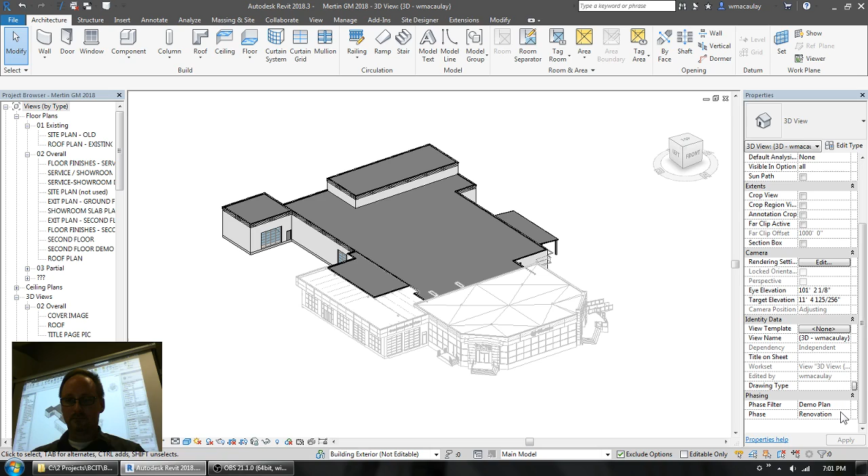So what we have here is a GM dealership that was modeled in Revit, and our consultants weren't using Revit, so quite often your structural engineer won't necessarily be using Revit. Let me get you just a color version of it. Okay, so there you go.

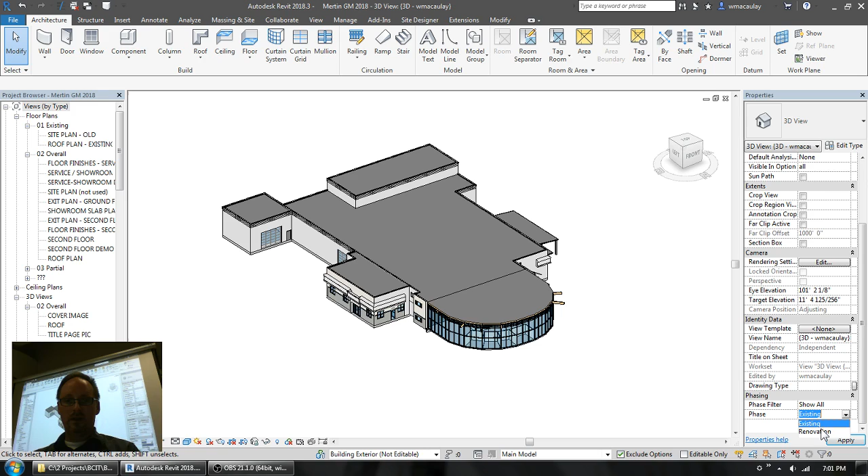Now, this building was kind of what it looked like before. It was just a very round shape at the front. There were some existing glulam beams, so we tore out the old curtain wall, expanded the showroom, and here's the revised version. That's a good example of how phasing was worked, to model an existing building and then add onto it. Here you can see all the existing stuff in the background that's in gray.

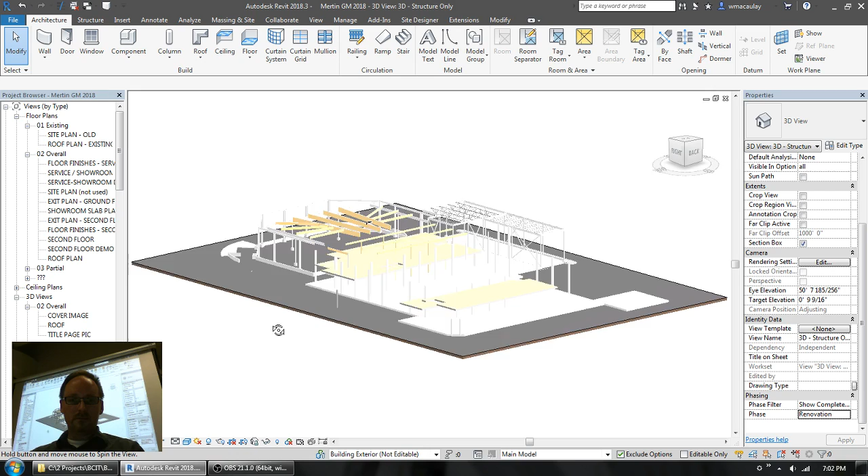Now the structural engineer provided us with their design, and we modeled it in Revit. So we have a mix of the existing wood frame construction, which you can see here, some of these glulam beams, and then the added steel structure around the front of the showroom, and there was a drive-through service that was added as well.

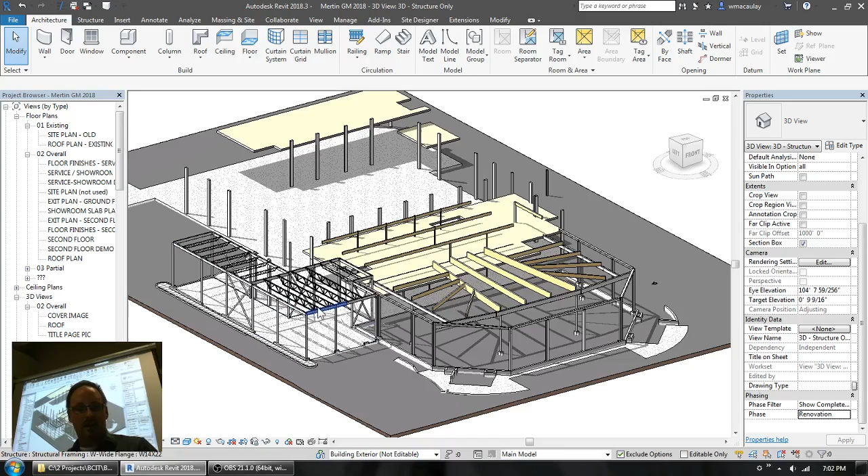So you can see the open web steel joists, steel columns, and curbs that were added. Now, even as the architectural consultant, this was by no means an onerous task for us to do.

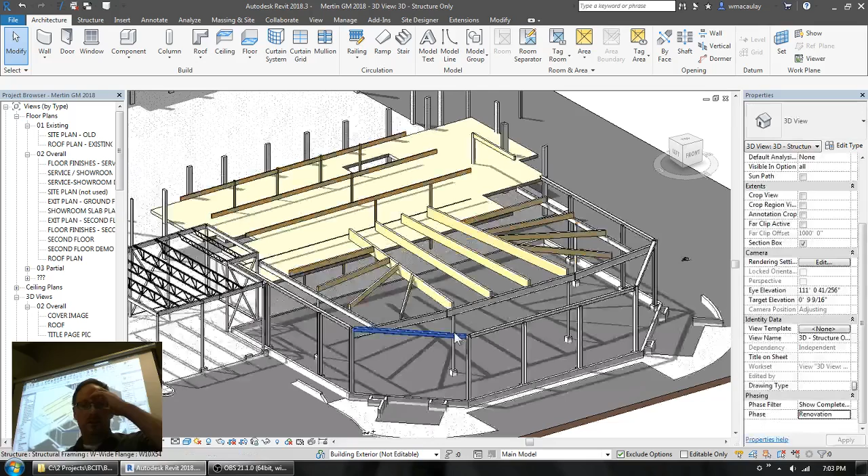As you probably know, the biggest conflicts that happen on site are between your structure and your mechanical systems, and this is no different. So in this project, you can see these big glulam beams here that were being borne on the end of this new W-shaped beam at the front of the showroom.

The problem arose where the mechanical engineer wanted to put a big, huge supply duct in between these two glulam beams and bring it down to the front of the showroom, then bring air supply in a bulkhead around the perimeter. It was quite deep, about 18 inches deep.

Because we had modeled this, we were able to, when looking at the mechanical engineer's drawings, look at a section here. You can see this section never made it onto a sheet—we just used it for exploratory purposes to determine that at the front here we weren't going to have enough room to get the mechanical engineer's duct above our steel beam and under the joists that the structural engineer had specified for this application.

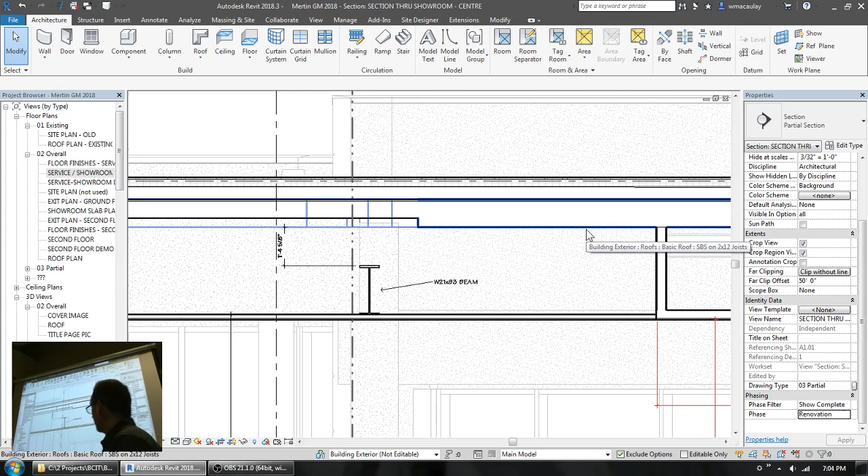So the glulam beams, you don't see them—they're buried behind a gypsum furring wall here that's obscuring the glulam beam sitting behind. So by the time this duct came down, there was no way it was going to clear.

So we had a quick call with the mechanical engineer, and we said, you need to flatten your duct and make it wider so it can fit over top of the beam. There's a good chance it might not have been caught until they were all on site and someone's looking up at the space going, hey, this doesn't work. So we saved ourselves a bunch of hassles by modeling the structure.

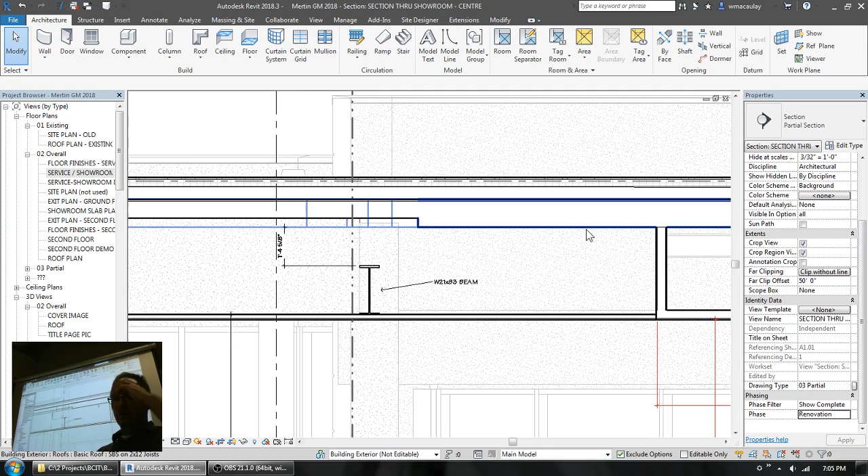Even if your structural engineer isn't providing 3D modeling of the structure, generally speaking, for coordination purposes, it's still a good idea to do so.

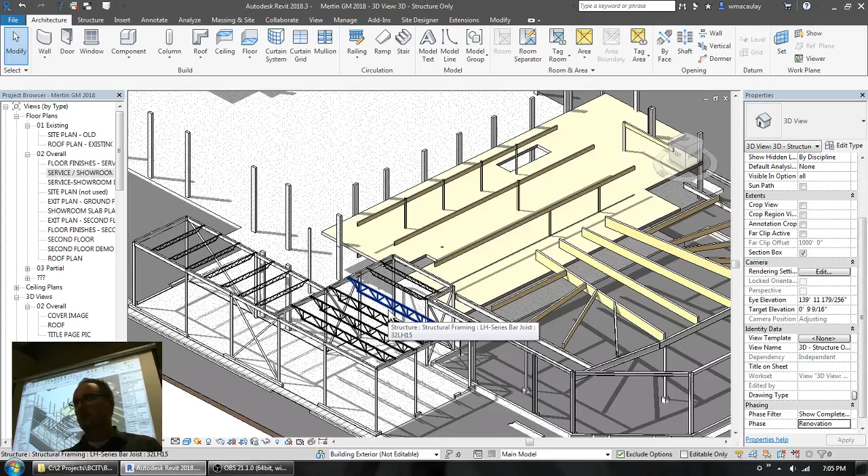Now, we don't model every single joist unless they're exposed, but we do model the major structure. Out here in the drive-through showroom, when you look up at the ceiling you see these joists, and as you can see, there's not very many, so it wasn't a big deal for us to model all this up.

So probably all told, to model this structure, you're not even looking at half a day's work. So definitely a worthwhile endeavor.

So let's look at the different tool sets that are here for the structural engineer. Now, in times past, engineers did model structure—not so much for visualization purposes as we see here, but more for analysis. What I want to show you is what you would often see in those structural engineering programs when they were doing their modeling.

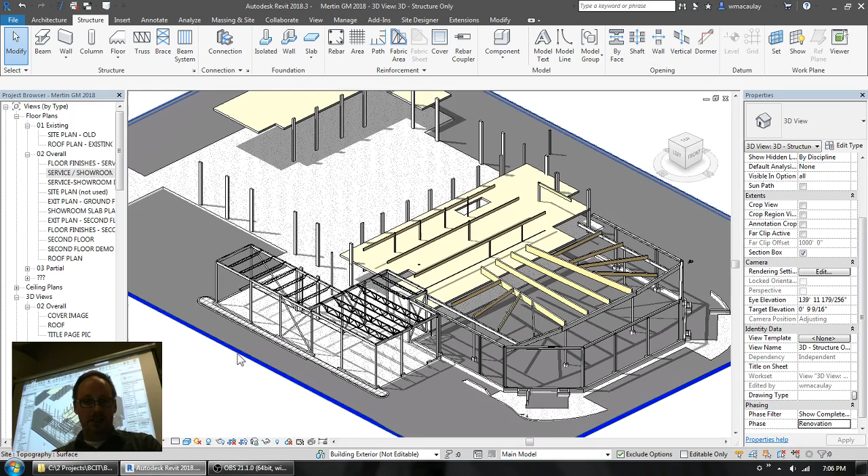I'm going to switch the level of detail here to coarse. Now, actually here, I need to do that with my categories. Just give me a moment here.

Okay, you can see that all of the structural columns and beams are now presenting themselves as a single line. So often when structural engineers are drawing or doing their plans, their plans often won't show the actual physical size of the member. They'll just use a heavy, solid line for that presentation.

During the modeling process, if structural engineers in the past were going to send their model to an analysis program, often those programs didn't model the structure either. This kind of unifies the modeling process for the structural engineering community. Just like you might have used SketchUp and AutoCAD to do 2D and 3D, engineers had AutoCAD for drafting and another program for structural modeling. Now, for them, the structural modeling and the drafting, the construction document process, can be integrated into Revit, just like it was for architects.

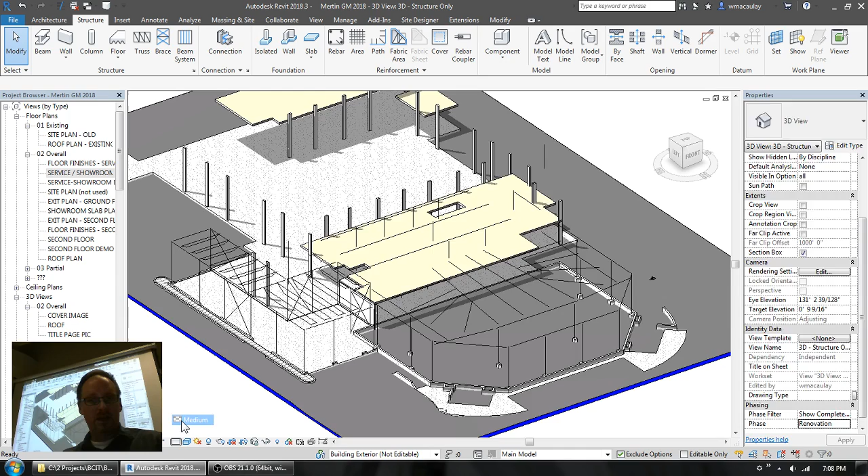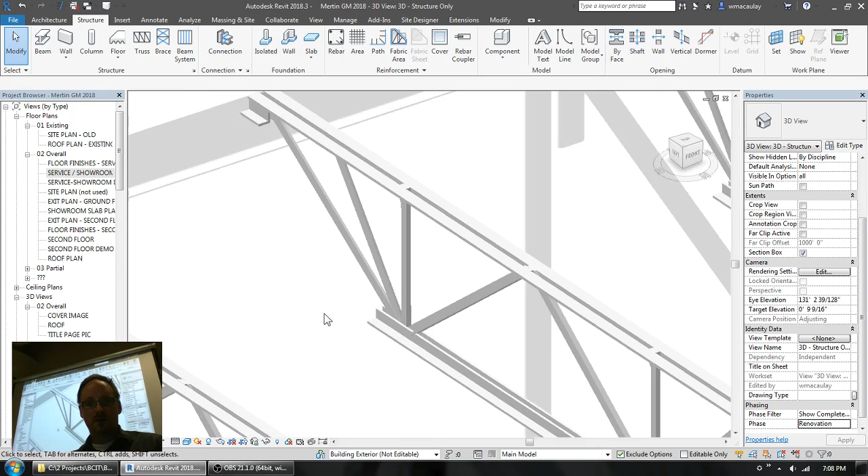Now, if you show structure in a medium or fine level of detail, you actually see the physical size of the members. The difference between medium and fine is only noticeable with certain kinds of structural objects. If you look at these open web steel joists, you'll notice that going from medium to fine actually shows the physical size of the webs. So at medium, you see the physical extent of the members, and at fine, you see them in greater physicality.

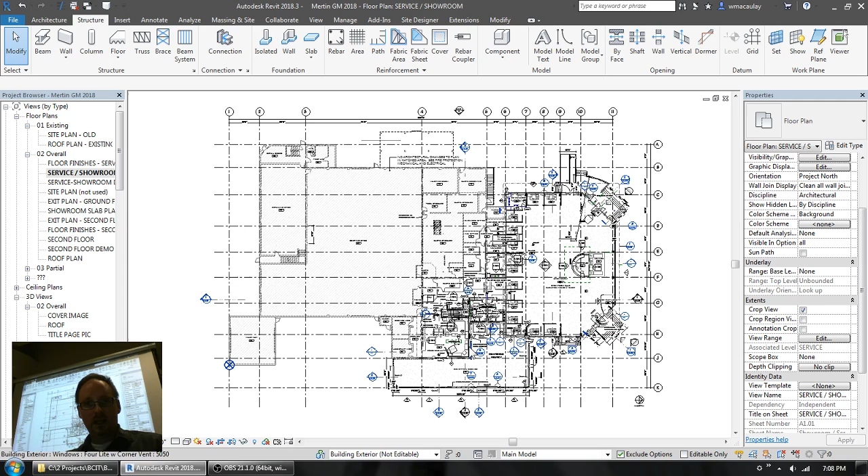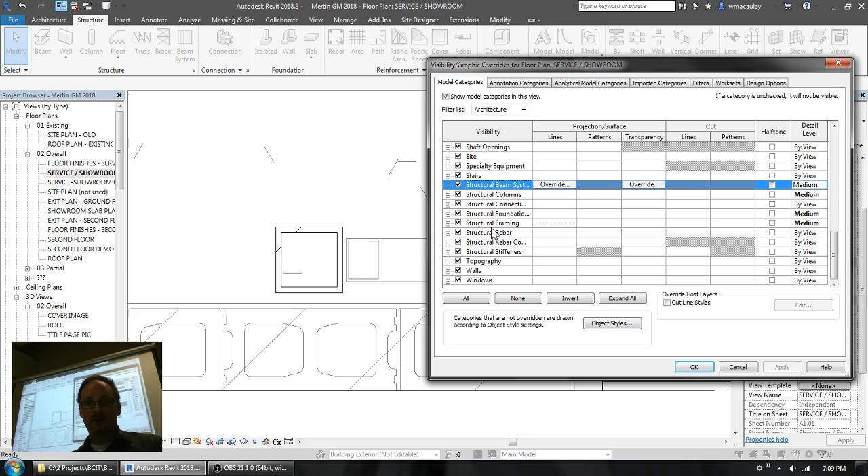There's more to this. In plan, if we look at a W-shaped beam or an HSS tube, let me turn the line weights off here. Now look at this HSS tube. You know that HSS tubes are radiused at the corners. One of the things you can do, which I'll mention as a tip later, is that for your structural categories, like columns and joists, you can force Revit to show them at a medium or fine level of detail.

So even if your overall plan is at a scale that warrants the coarse level of detail, you may still want your structural objects to show with a degree of realism, so you may override them to show as medium, as I've done here. What I want to show you, just like with the joists between medium and fine, is what happens with these columns between medium and fine. So here's the fine level of detail now.

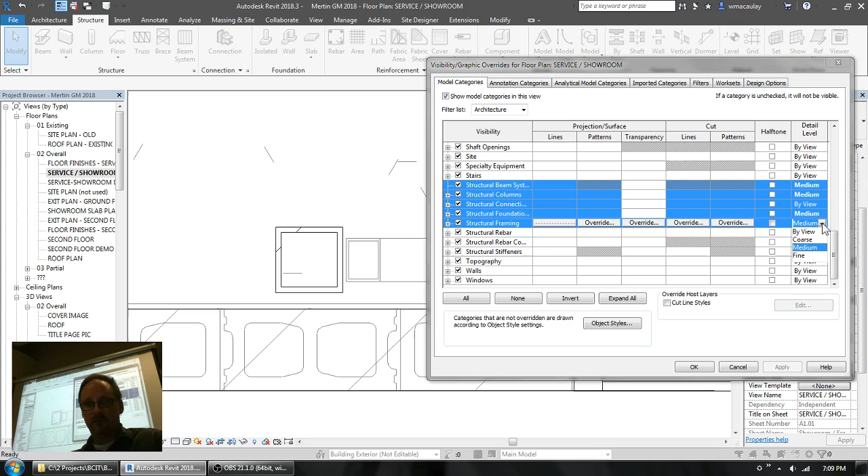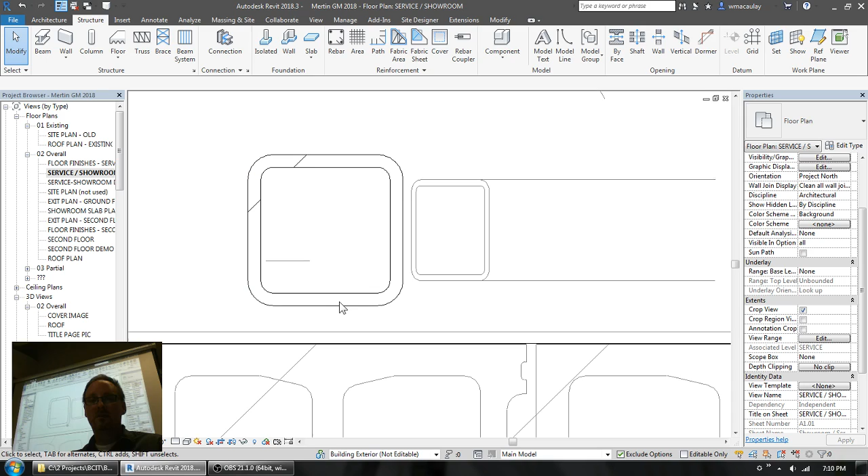So now you're seeing the radii on these HSS tubes. What's going on? What's being modeled here? Well, at the medium and fine level of detail, there are actually two solids inside this column. There's a solid with the radius in it, and another solid that's just mitered to a 90-degree corner. And you're like, really? Why? I don't know exactly. I guess the developers decided that for optimization purposes, showing these actual curves wasn't going to happen until you switch your level of detail to fine.

So just be aware of the differences between coarse, medium, and fine, and how they display on your screen, and that you can, in any given view, override the level of detail for any category. For my structural categories, I'll often switch them to the medium level of detail for my working drawings. And you can see now it's going to switch back to 90-degree corners.

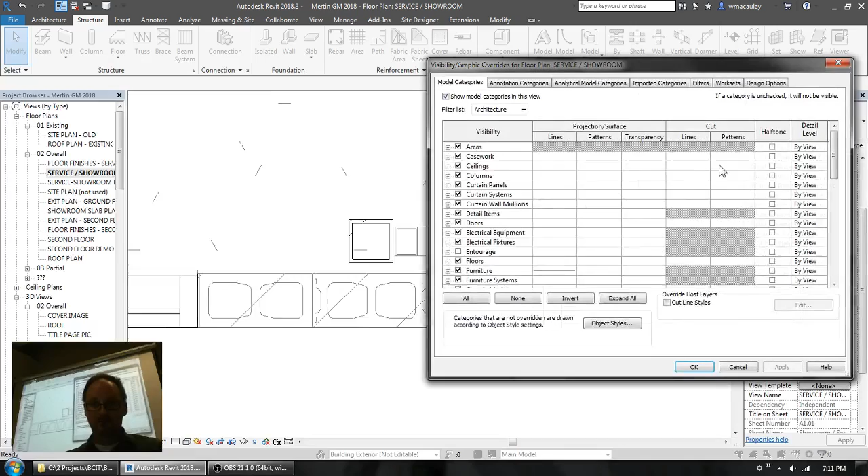At the coarse level of detail, by the way, your columns are no longer being modeled. Revit just shows a 2D line at the extent of the column. So theoretically there's a performance improvement from that, but our computers are so powerful, to me it's like, what's the point? This is a feature that was baked into Revit years ago when we had to model buildings using a Pentium 3. Now that computers have come a long way, I'd say this feature is obsolete. So I will always show my structure at the medium level of detail.

So the structural tools provided are beams, columns, and beam systems, plus your foundation tools. Now I am not going to get into any of the rebar tools, that's beyond the scope of this course. If you're an architect who needs to model the engineer's structure for coordination purposes, rebar is not your gig. Just stick to showing the columns and beams. So that's what we're going to focus on tonight. Now there's a certain strategy or order of operations to creating structure.

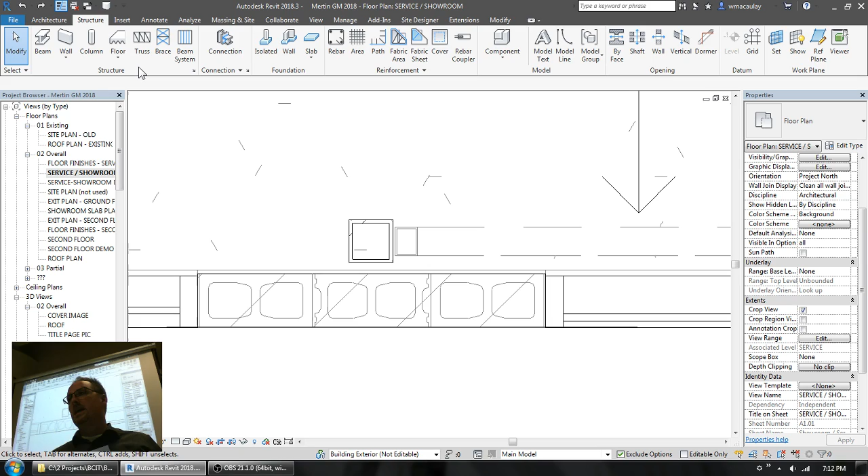If you look under the structural tool set, we talk about creating columns first. So you put your columns in, and then beams, and then beam systems. I'll show you why in a few moments, but that order is analogous to how we do our buildings in Revit. We start with the walls first, right? We draw the walls for our plans, and then we add floors and roofs.

At the bottom of page 1, we've talked a little bit about the difference between structural and architectural drawings. Structural drawings show the structure supporting the floor that you're looking at, and architectural drawings will show the structure above or within the room that you are standing upon.

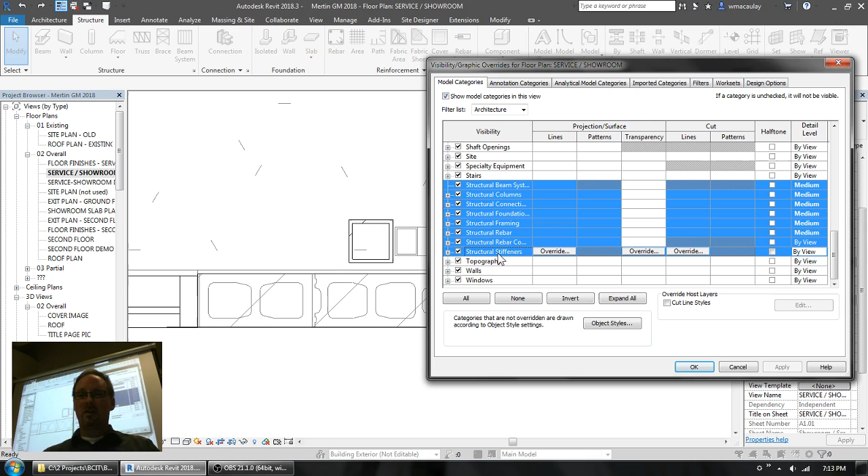We talked about the simple heavy line, and we'll often override the level of detail in a view. So you go into your visibility dialog box, just like I was showing you, and go down to the structural categories, pick the first structural category, shift-click the last structural category, so that you can override all of these categories at once, so that you don't have that super simplified presentation of structural objects in your views.

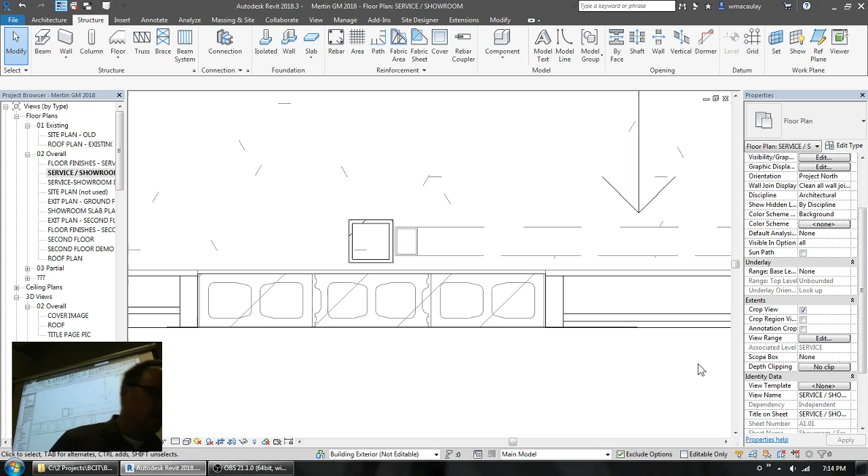Point number 3 at the bottom of the page, we talked about how structural columns, when you draw them, will tend to draw downwards, and architects will draw the columns upwards. So when you start using the structural column tool, the very first thing you need to do is switch from depth to height when you're putting in that column, so it goes upwards in your plan instead of downwards.

Another aspect with modeling structure is how multi-story structure will be drawn. If you have a residential tower of multiple stories, many of you I'm sure have worked on such projects, what happens is you'll have a column of a certain size at a lower story, and as you get up to the higher stories, that column gets smaller and smaller, or thinner, or changes shape as you go from one story to the next.

Now, if a column is of a certain size for 10 stories, model it as one column that's 10 stories tall. It's easier for you if you have to move that column around in your parkade to get the parking layout to work. Move it around, and then that column for the next 10 stories up is going to be in a different place in your plan, and you won't have to truck through all the plans and relocate that column.

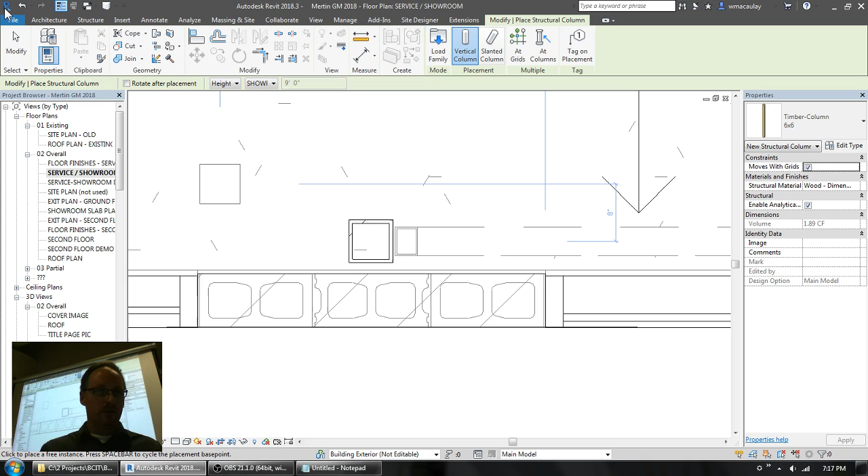All right, so let's move over to the next page here. Now I am going to start a blank architectural project, and I recommend that you folks do the same. So I'm going to start a new project here.

Now what I would recommend that we all do is create a set of grids in each direction. So just draw 3 or 4 grids in each direction so we can talk about how the structural column tool works in conjunction with your grids.

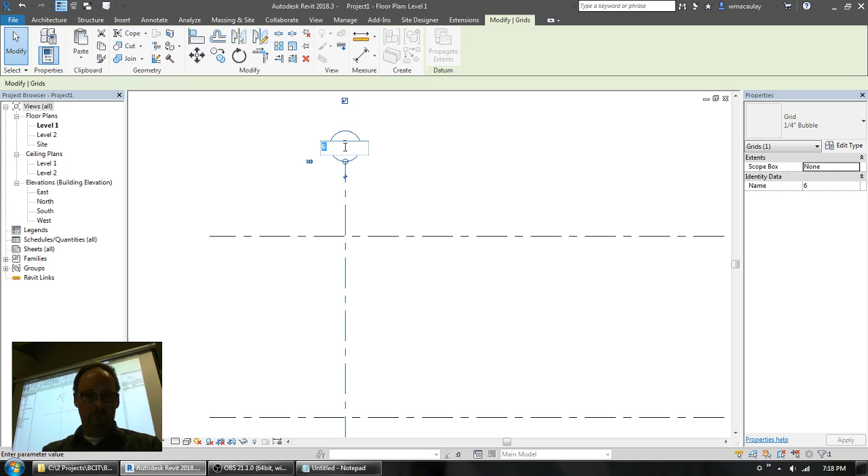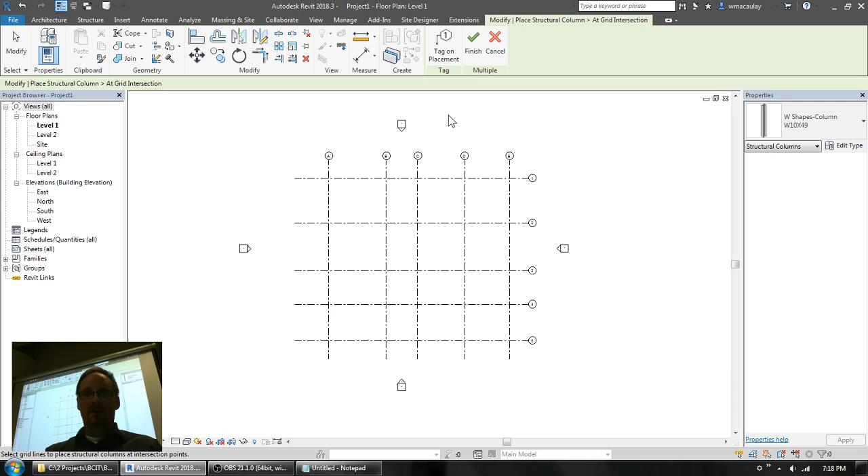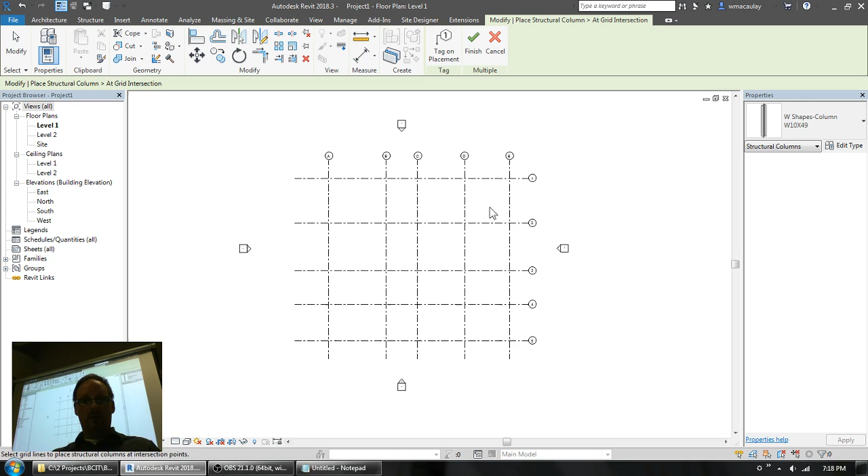Structural columns are often put at grid lines and at grid line intersections. So when we are using the structural column tool, there is an At Grids option. If you click on the At Grids option, you can see the Revit interface changes a bit, and it's giving us this situation. If you look on the status bar, it says select grid lines to place structural columns at intersection points. So if I just select a couple of grids, have a look.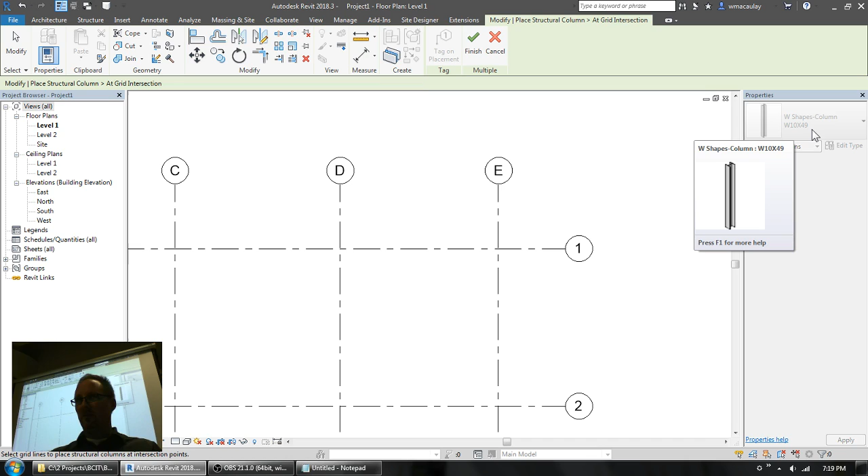First of all, before you even get started here, you have to choose the column type that you want used at all these grid line intersections. So if this W10 by 49 isn't the right size, you want to preload that column before you get started. So no big deal there.

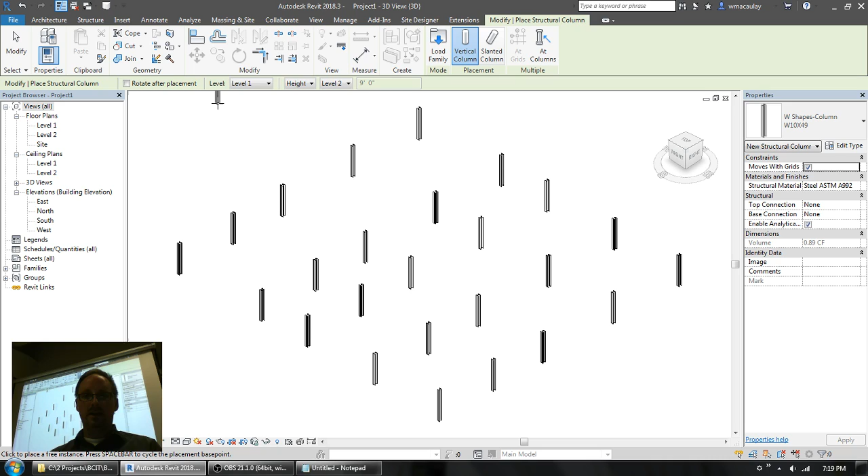So if you crossing select all of the columns, you can see now that if you hit finish, you get columns at all of those intersections. So when you look in 3D, there's your column layout, placed at all of the grid intersections.

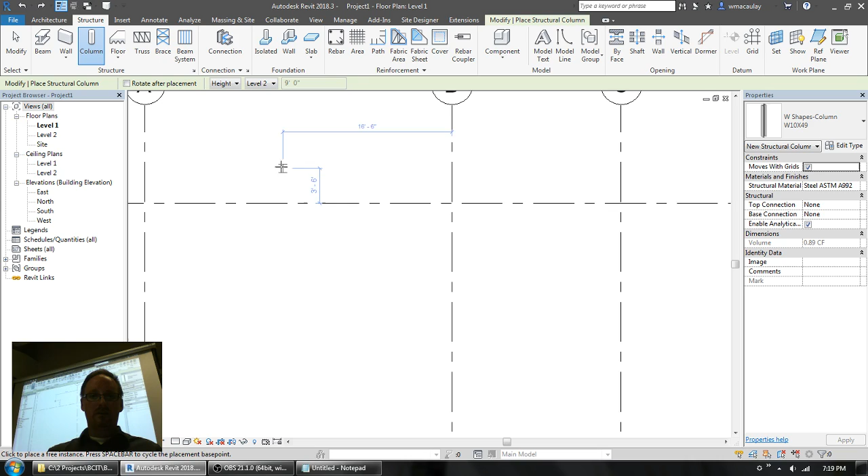Now I'm just going to undo that step and talk about some other aspects of the column placement. If you're using the structural column tool, you don't have to place it at a grid, you can place it anywhere. When you hit the space bar, it rotates at 90 degrees. If you put it on a grid, it rotates at 90 degrees. But if you place it at a grid line intersection, it rotates it through 45 degrees.

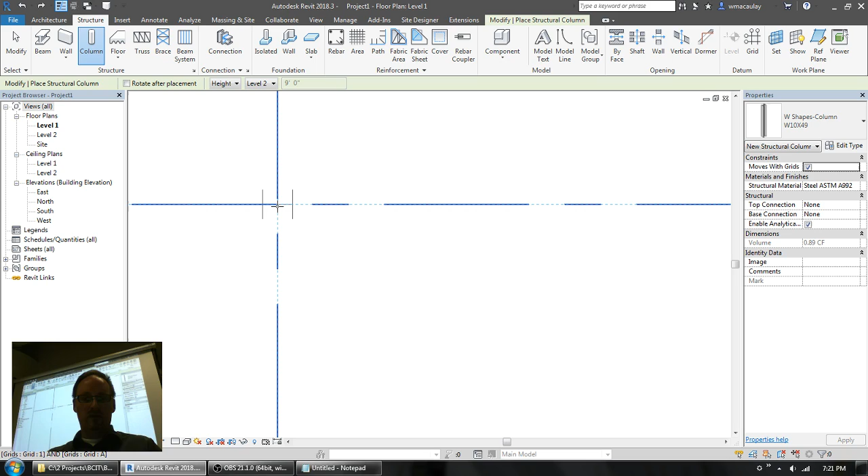Why is this? Well, it's quite common in steel construction for 45-degree angle grids to be put in place, to prevent or resist lateral loads and to deal with diagonal bracing in a floor diaphragm. That's done in steel construction, and of course steel construction is probably more common in the States than it is here. So that bit of functionality where you hit the space bar and it rotates the column through 45-degree angles, that's where that feature comes from. Just hit the space bar when you're at a grid line intersection and it rotates the column around.

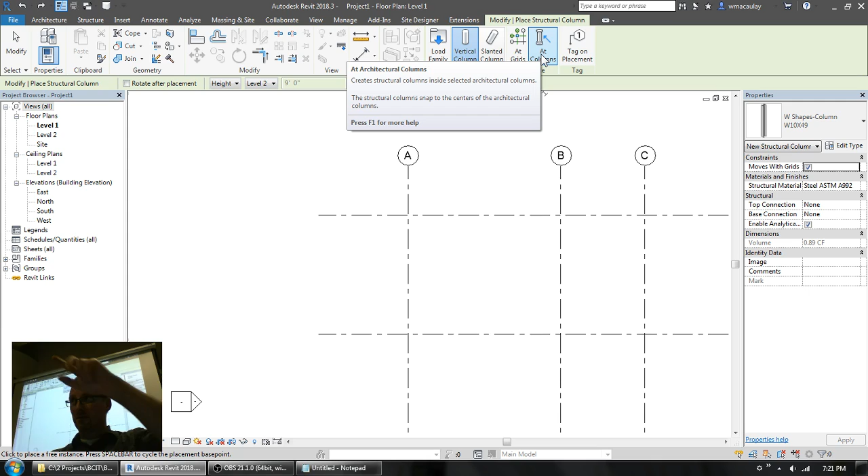Now you'll also notice on the Place Column tab that you could place a structural column at a pre-existing architectural column location. So if you have some architectural columns already in the view, you can hit the At Columns button and it'll place structural columns at locations where architectural columns can be found.

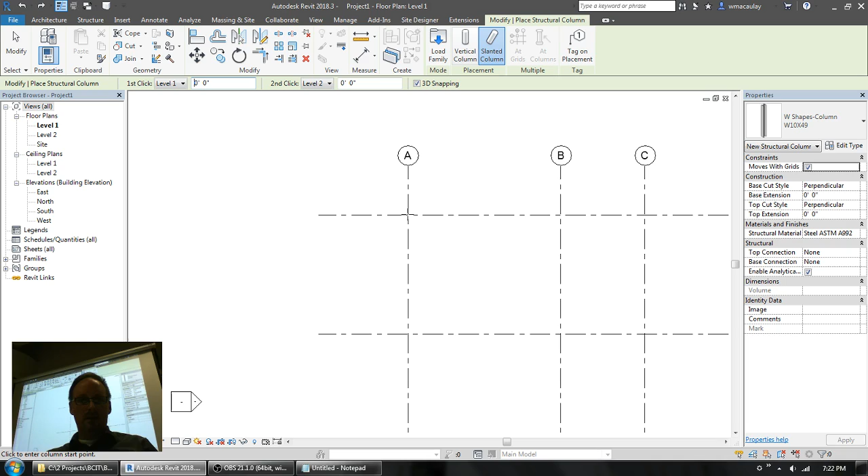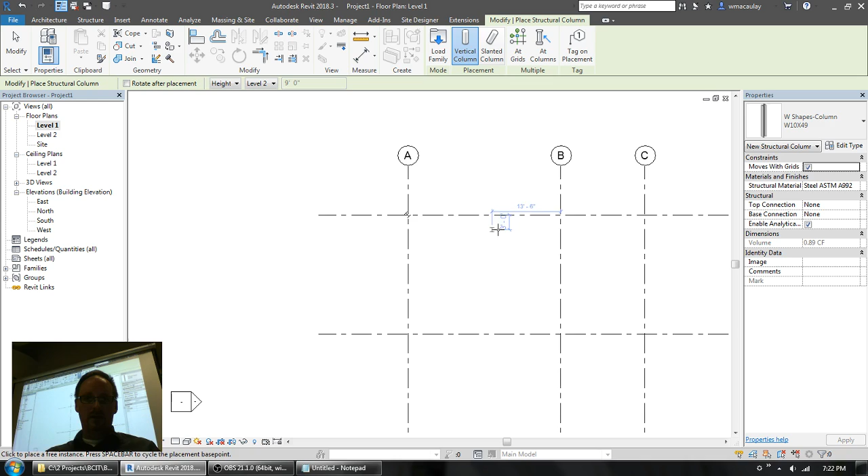So I'm just going to place this in here now. And if I go back and look at it in 3D, there's my column. Now just to give us some context here, I'll go back to my level 1 plan and put in some columns here, vertical ones, just in these other locations, so you can see what I started with. So there's the 3 vertical columns and the 1 sloped column.

You mean like trim it at the top so it's cut off? No, if we want it to be 3 degrees or 90 degrees. Oh, okay. So the question is, how can you place a column at a specific angle?

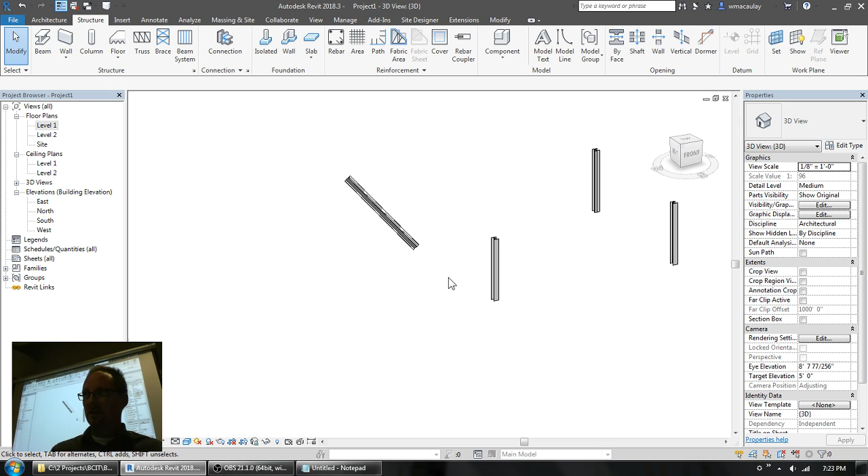That's a good question. So what I'm going to do is, this column here that I'm placing, I want to put a column on here at this grid intersection at a 45-degree angle and leaning out at a 10-degree angle. So how would I do that?

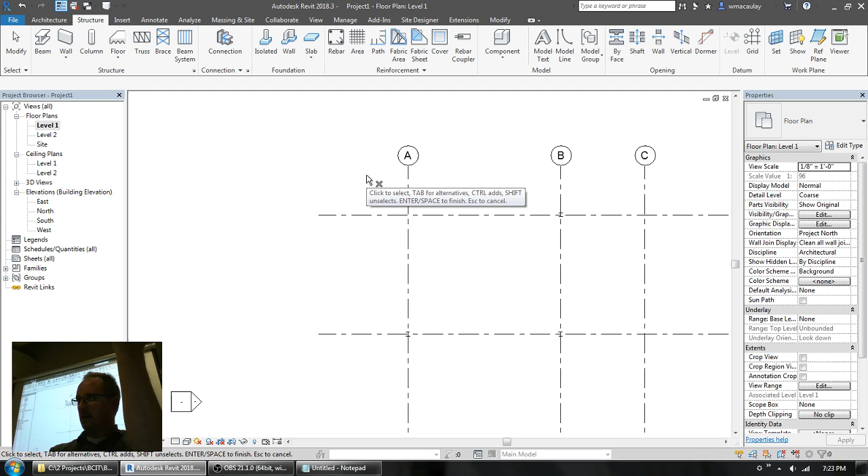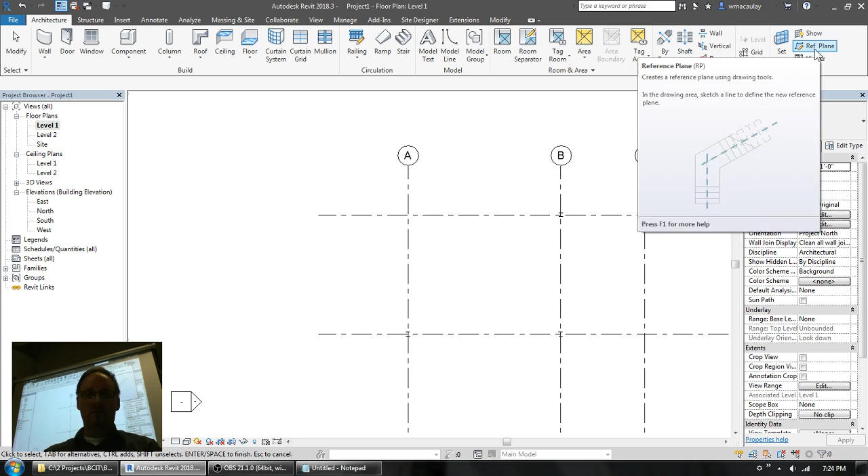Number one is we would put in a reference plane. Reference planes are really handy when you want to put geometry at a certain location, especially if you need to draw it on an angle. So I'm going to draw a reference plane here from this grid line intersection, going out at a 45-degree angle. I'm looking for 135 - there it is. So I've got this reference plane sitting here. Now what I'm going to do is name that reference plane. After you put in a reference plane, you can name it, and you'll see why we do this in a moment.

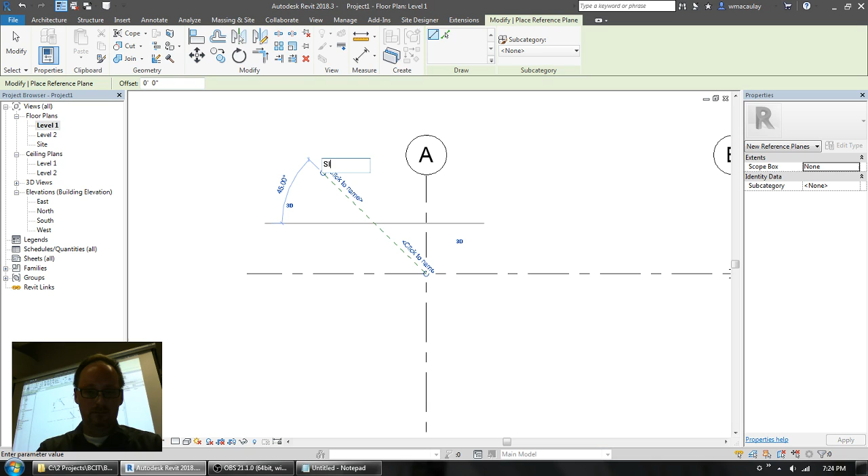So I've called this reference plane sloped column. Now what I need to do is create a section or elevation that's looking perpendicularly at this reference plane, so I can draw that slanted column on it.

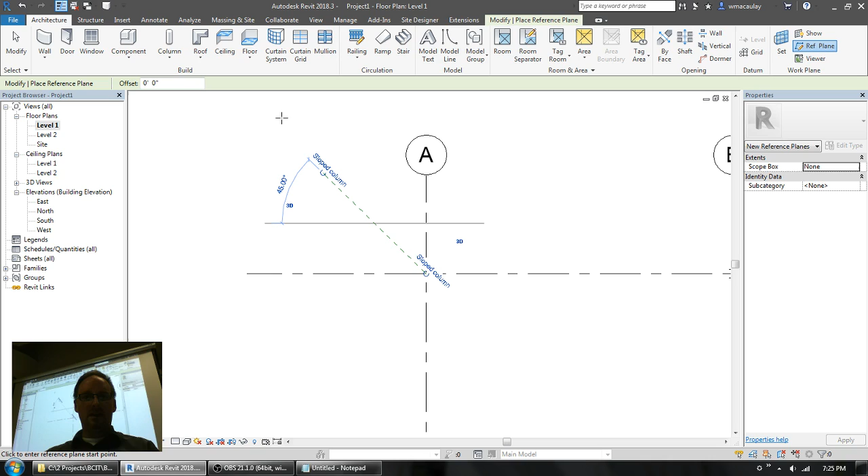There's a couple of ways to do this. On the View tab, you can draw a section, and when you draw a section parallel to a reference plane, it will snap to it. Revit pays attention to the location of those reference planes. That's one way. You could also draw an elevation, but no, that's not going to work here. We're going to use the framing elevation instead.

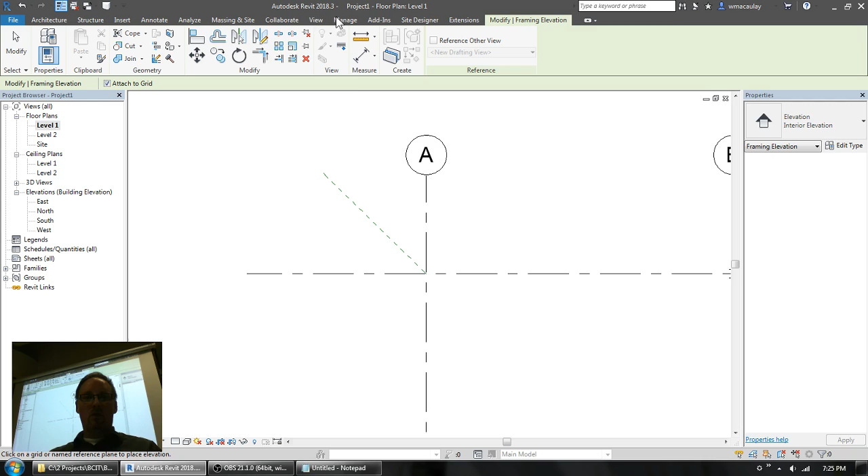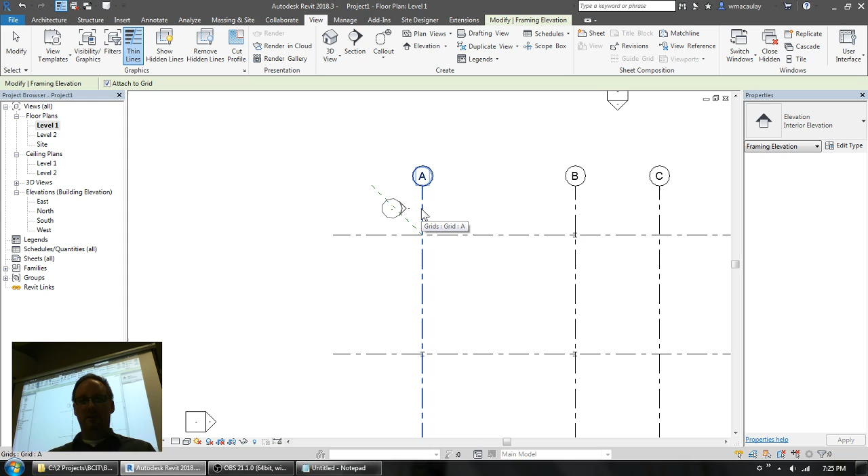View, elevation, framing elevation. Now look at this. When you use the elevation tool on the View tab, there's a drop-down menu. I'm sure you've used the standard elevation tool frequently, but we're going to look at the framing elevation tool. When you use it, it will automatically snap to and pay attention to grid lines and reference planes. So now we can create an elevation that is looking perpendicularly at that reference plane. So there it is.

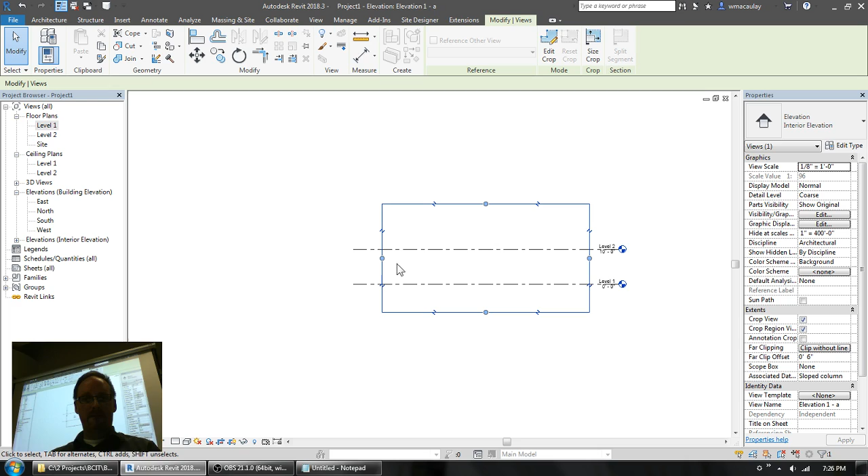So now the next step is to open this elevation view, just by double clicking on the pointer. And there's my elevation. Now, how do I know where I'm starting from?

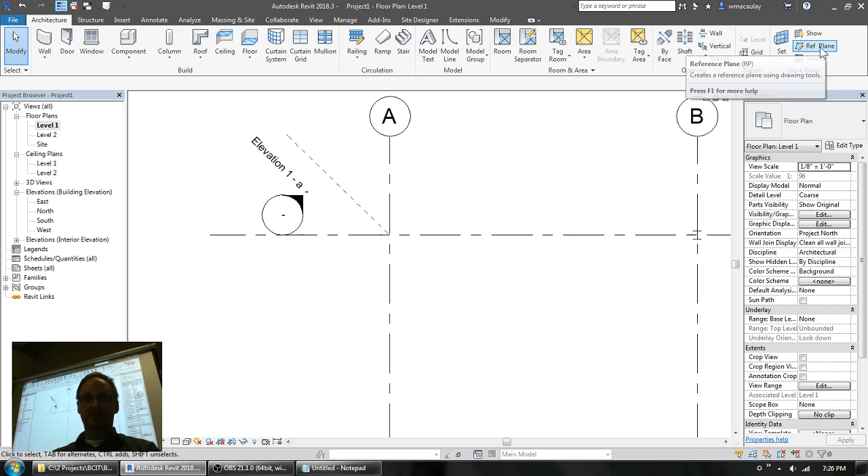I've got my two levels here, but I can't see where I'm starting from, so I need another reference plane to show that. On the Architecture tab, I'll grab the reference plane tool again, and I'm going to draw another reference plane perpendicular to the first one. I need to do this so that in that elevation, which is looking perpendicularly at the placement plane for our column, we can see where the starting point is with that other reference plane.

I don't need to name this next one. It's just going to be there as a reference when I look in plan, or when I look in my framing elevation. So I will return now to the framing elevation. So there is the starting point for my column.

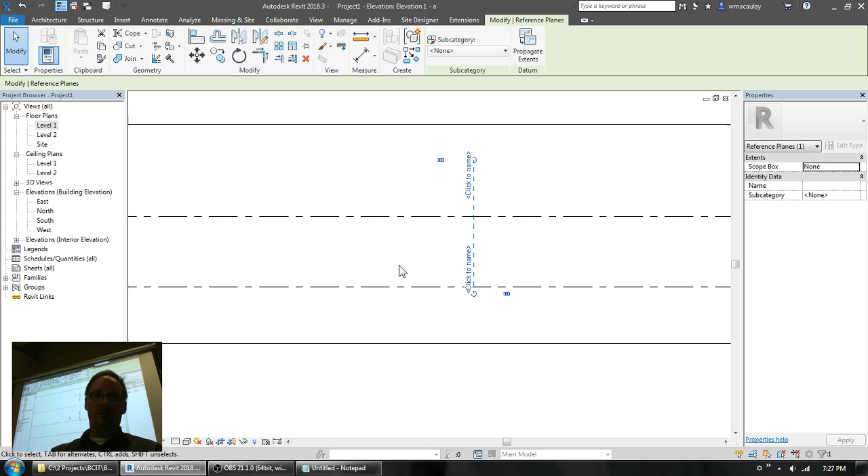Now remember that I named that other reference plane, and here's why. In this view, I want to draw that column on an angle on that reference plane, right? So on this reference plane right here, this one, and I named it sloped column.

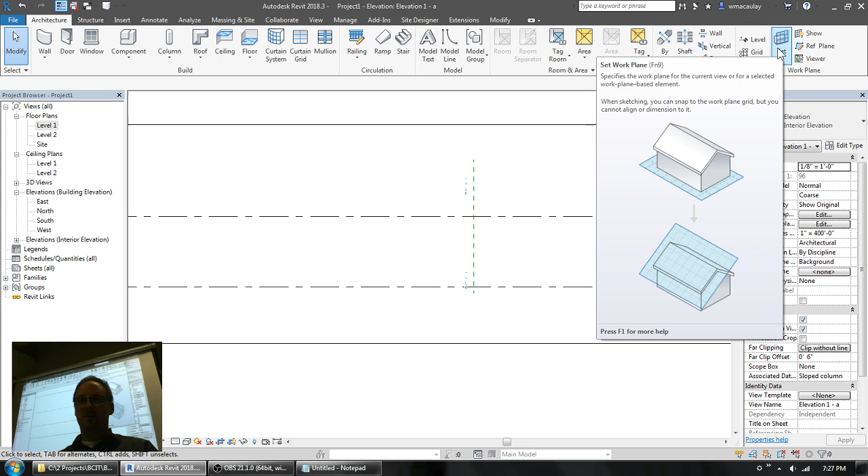So when I return to my elevation, what I'm going to do now is use the set work plane command. We're going to be using this command quite a bit over the next few weeks. Out of the name drop-down at the top, it'll show you all your grids and all your levels and any reference plane that's been given a name. So you can see it's in the list here.

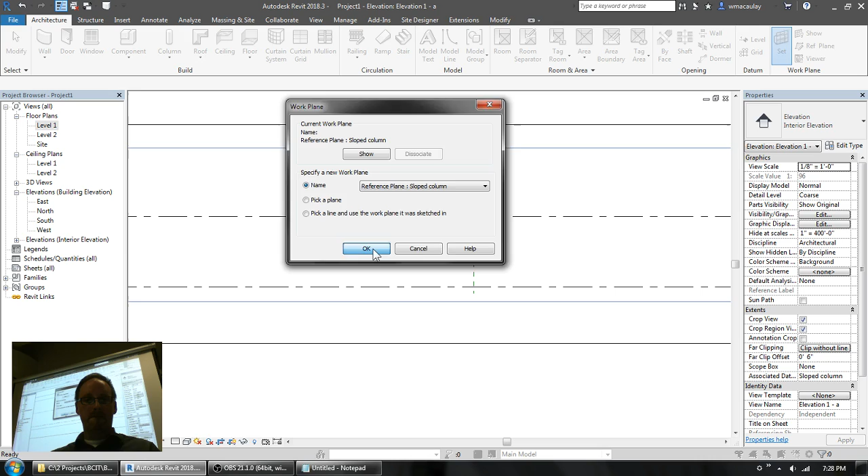So with this reference plane named, I can choose it out of the set work plane command on the Architecture tab and hit OK. Now whatever modeling I do will be placed on that plane. So now when I use the Structure tab column command, you can see I don't even have an option for a vertical column. Revit knows you're probably in the mood to do a sloped column here. And so we start at this intersection, and we can draw it at any angle that we want.

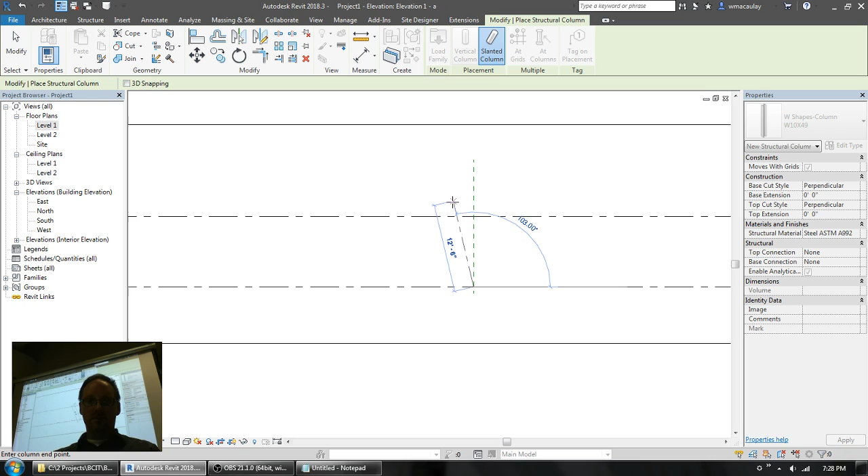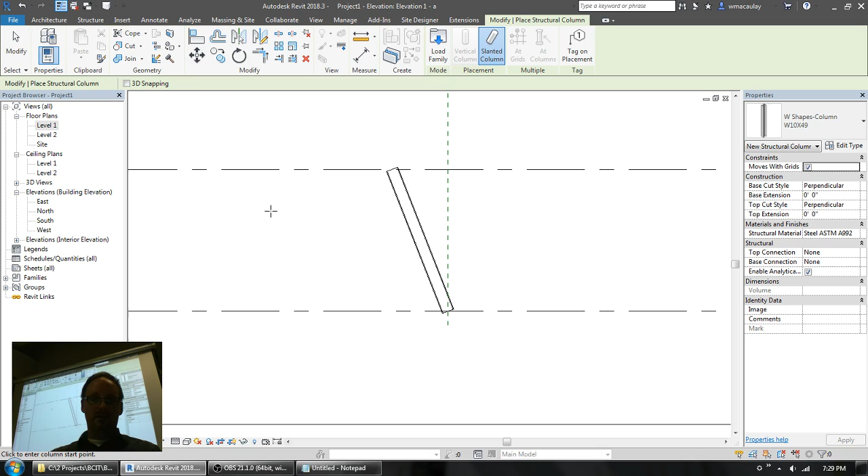So if I want to do that 10-degree angle, or 20-degree angle, so here it is, I can draw it and make it so it goes up to the second floor. Now again, at coarse level of detail, if I switch to medium or fine, then I get to see the actual physical size of this column. So now we have that column angled out on the slope that we want.

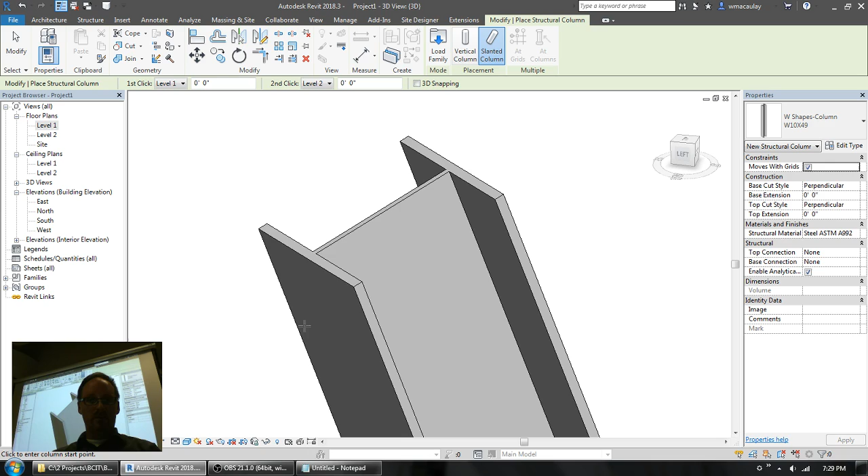Now again, pay attention here. When I switch from the medium to the fine level of detail, look what happens to my W-shaped beam here. It actually will show the curved fillets. So maybe for rendering purposes, you may want to show the curves there. If the camera is a long distance away, it doesn't matter. It's up to you what you want to do with that level of detail.